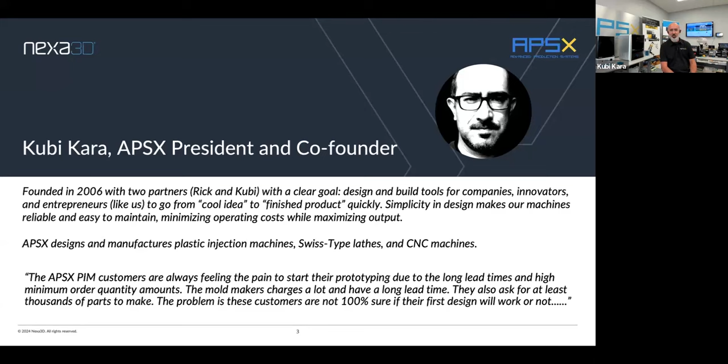Thank you, Carsten. Welcome, everybody, to our webinar today. I'm Kubi here at APSX. We have been selling these APSX PIM desktop injection molding machines since 2017, about 6 years now. Our specialty as a company is to downsize industrial machinery to portable, efficient, and affordable options for everybody. Our goal is to make them accessible to everybody, not just the ones who have budget for space.

And our company goals are multifaceted. First, one of our goals is our machines have to be affordable. And by affordable, that's not just the pricing but also the size, because for some countries, for some cities, space is also a premium asset. And also, our machines are sustainable. That means you can minimize your waste, and you can be environmentally responsible as a company or as a person. And another goal of ours is our machines have to be efficient.

That means you shouldn't spend a lot of time setting them up. They are easy to learn, easy to set up. And our final goal is our machines have to be agile, because if you go to market faster than your competition, that makes a huge difference. So our machines can provide a faster-to-market approach.

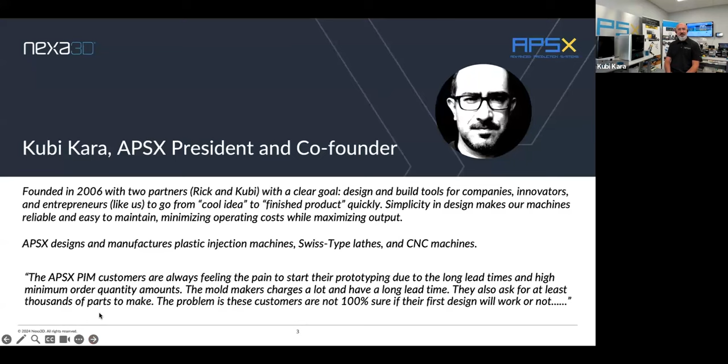Thanks, Kubi. So in general, we're going to refer to FIM, or whatever, during the presentation here and during the discussions. And that does mean freeform injection molding. So don't get confused. I just wanted to make that very, very clear that it's the abbreviation that no one else knows than a few here.

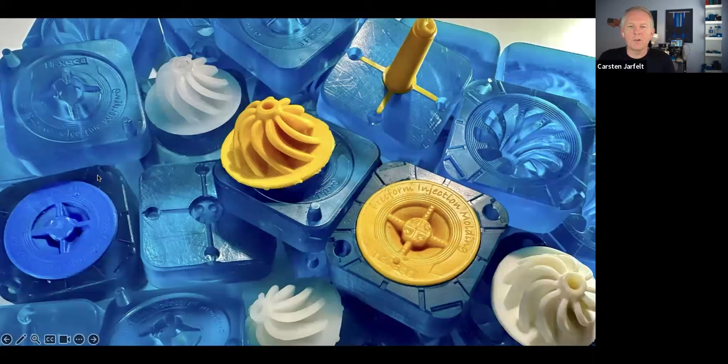But what people are starting to notice is that it is exactly as Kubi said, it's enabling teams to do certain things. And today we're going to look at parts that look like these that would be very hard to tool up for in any other way than this.

We're also going to look at what it actually means to have a technology backing your decision making, because a decision to do something or to not do something are both good decisions if they're based on data. That is sustainable and maybe impactful, if they're done on gut feelings, it's not.

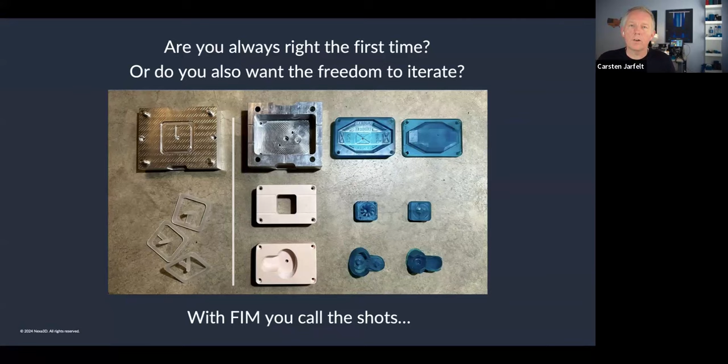So what freeform injection molding is doing on the back end of a lot of technology and software is actually enabling you to make decisions, validation studies, and give you options to perform or stop doing exactly what you shouldn't do at the current stage in the current design. So it's an enabling technology stack that gets you to places.

And I think the place we want to end up at after this webinar is actually on your end of this conversation. What does this mean to you? How would that impact your business? How could you gain competitiveness? What could you do that is different than what you can do today based on your current options available?

And then it's a lot about why using FIM. What is it? Who is using it? How does it look? That's the most important thing. That's the most interesting thing.

In our world, hands-on as we can be on these cameras here. And to you who sees the screen shared with slides, I do also have a couple of cameras. Let me introduce them. This is the most boring one - that's me.

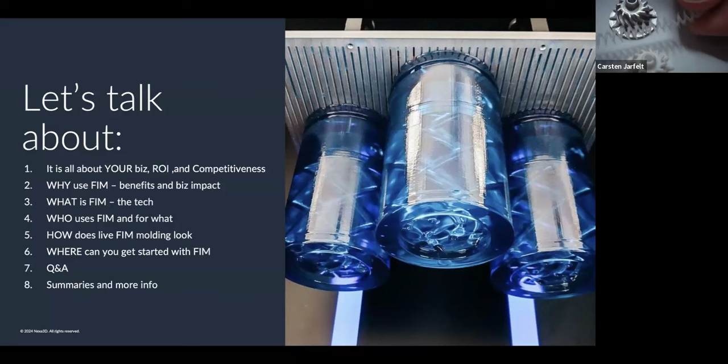This is the top-down one where I have all kinds of products that we can talk to if you have questions. Then we have a close-up over here because we also do metals, MIM, CIM, ceramics, and soft stuff, and you would have no clue what I'm talking about unless you could see it. So we have a macro camera.

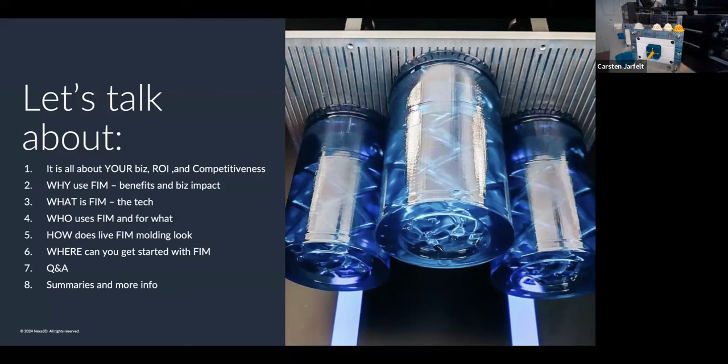And then behind me, just as Kubi was showing, I have Kubi's amazing machine and our modular mold bases. So during the Q&A, feel free to refer to any of these things that you just saw, besides just seeing slides.

All right, so back to your end of the stick here. What are you getting from potentially implementing what we're talking about? Well, if you can work with designing in new parts, new materials early on, that's maybe a business for you.

If you are able to customize, adapt, and do alterations on the go of very performance-ready and already validated parts, but now in need of a certain update or slight modification, this is a way that you can use FIM, freeform injection molding.

We have clients totally focusing on using spare parts management, using our tools for spare part management, because they have so low volume and so high performance criteria that they can now use this as a technology.

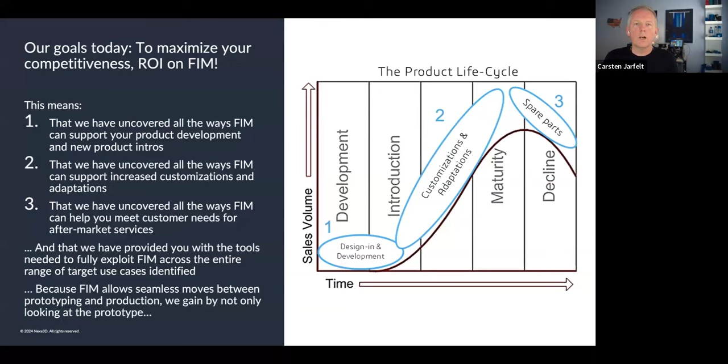But if you think about this product life cycle, how many places you are met with certain choices and non-choices or non-options. That's why freeform injection molding gives you that smooth transition between not just what we can deliver as a technology for you, but what are you actually going to make with that technology. And we are moving up and down that product life cycle curve all the way during the presentation and discussion here.

And I think back to the why. Why is, in my opinion, often about the business, about the value behind the technology and an offering, whatever it could be - in this case, FIM.

We touched upon it already, but you can do more and assume less, because you can actually make parts. You can test 7 gate position locations on your part on the same build plate, maybe the same day or next day. And then you will know which one of those 7 is interesting, and which 6 you shouldn't pursue further.

So that's doing more and assuming less. And then just the fact that you go from idea to parts in a very short time, without compromising, without being an amazing tool or mold maker designer - that is also value.

And then, I know it's a pun right there, but you call the shots, right? With the platforms that Kubi is standing in front of, you can see it's a 10-feet tool line with everything you need, from printer to cleaner, curer, demolder, and an awesome 5-ton mold unit, right?

So you call the shots, because you call also the supply chain limitations. You are the one, and then you can also sacrifice the time - well, you don't have to sacrifice time on heavy resource loaded tasks, because we have software helping you.

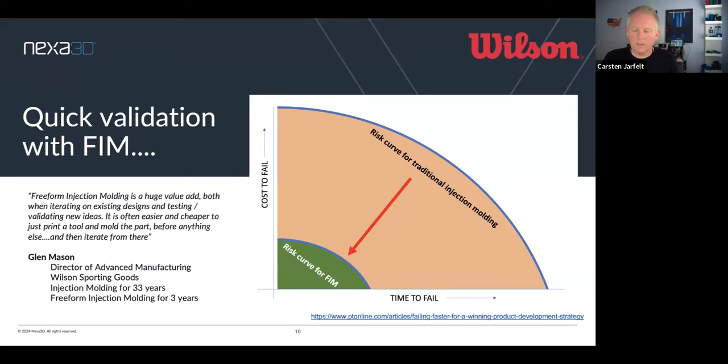These words come from a guy, the director of advanced manufacturing, Glen Mason, who has 33 years of molding experience and 3 years of freeform injection molding experience. When he puts it to the internal discussions when they onboarded our platforms years back, they talked about leaving resource-heavy tasks behind: not having to design a part for manufacture, not having to be a mold designer or do a mold design, and not having to build a tool but print a tool.

The part DFM and mold design simply was taken out of the lead time, and print versus build was shrinking the time to actually make a tool dramatically. So I think 3 years back they said they went from 12 weeks to 7 weeks of lead time. I think they're even lower now, but they cut roughly 50% of lead time on everything.

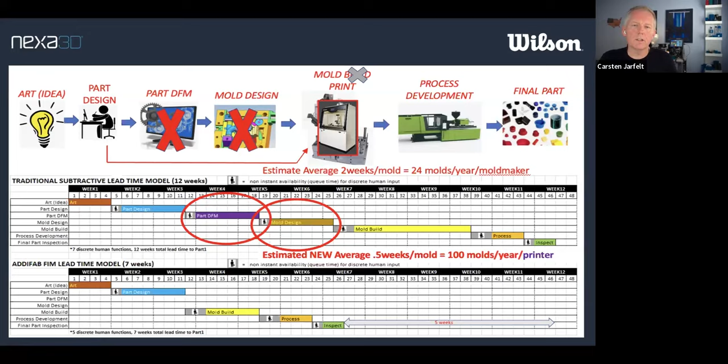And that's why you get to do stuff like this. Just 4 examples taken straight out of the goodie bag. Upper left corner, living hinges, caps, PP, 100% recycled PP. Upper right corner, PepsiCo's blue bottle or blue cap in HDPE for their bottles, a project they nailed pretty quickly, as you can see, using our technology.

Medical device adapters - anything in medical device requires certain materials, and we can work with those. Our technology is also biocompatible, so we don't change the properties of the material you want to use. And then lower right corner, badass 40% glass-filled nylon for automotive as an example.

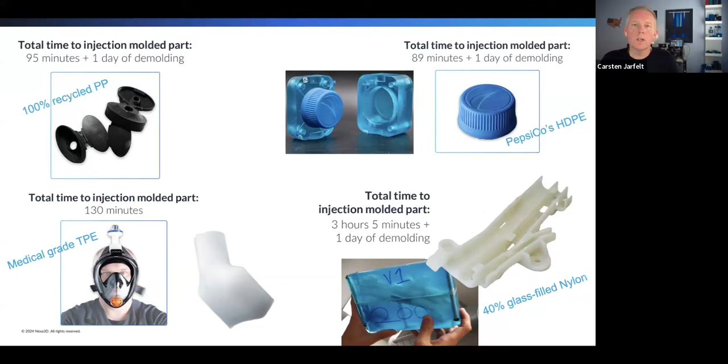But all coming to life in a pretty fancy, rapid way, but also without compromising what you're setting out to do. Original launch materials, step files that you want to produce, and with our software you can get some help in doing the mold files that you can print.

Printing is where it all starts, and where most, I would say, prototyping projects start out, because you want to explore stuff like design freedom and fast delivery of your first thing in hand. And then at some point you want to move on to molding.

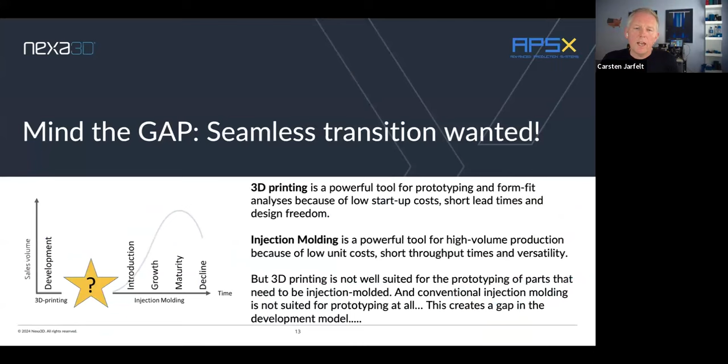What we kind of said is those 2 entities bring the best - they bring the best from the freedom, and they bring the best from the materials and processes. And you always had in the past to change between 2 technology tracks, but now you don't, because you can actually get the best of both worlds, so to say.

You can start up with the additive space, which brings you all that short lead time and design freedom. And then you can actually go over and take the versatility, scalability, and all that quality materials that are known to reside in the molding, injection molding part of the domain out there.

Combining those, you will actually get where you can go from an idea to a tool to a part to a validation thing seamlessly. You started out in molding, you just happened to use a printer to print your tools. But that same printer, the installed base, can also print you the parts.

So it's the beautiful handshake between - are we looking for form and fit today, let's print a part, or we're looking for form fit function, let's mold the same part. But let's start using the same installed base equipment to print in different resins. One can go to tooling, one can go to part level only, you could say.

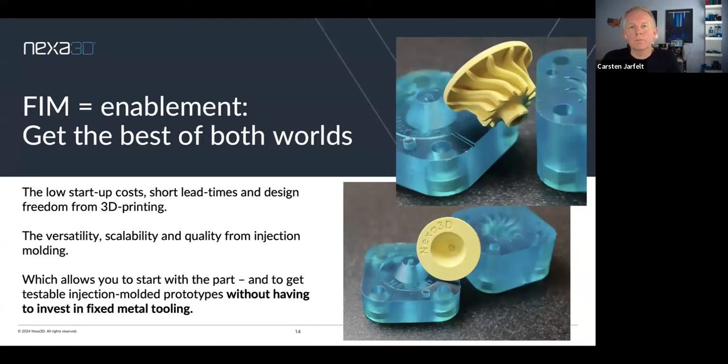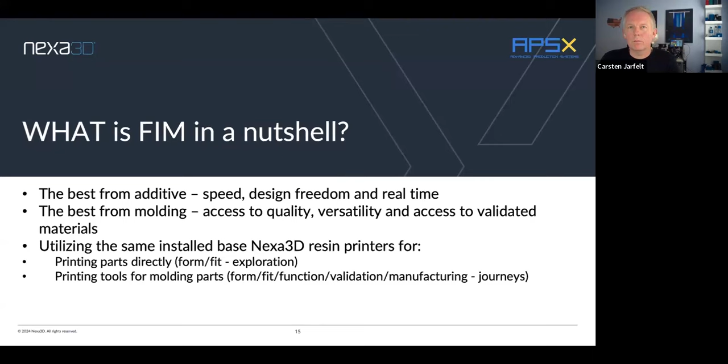So we want to bring you that, and we want to make sure that you don't get held back by technology limitations. We give you a hammer and a pretty good tool shed, but we know our hammer and tool shed sits very well with other tools, and you should use a combination of tools. FIM is just a pretty widely applicable starting point for designs, materials, and speed to something.

That mold design you print on one of our resin printers in a tooling resin called XMold. You'll hear more about that shortly after this slide. Then you go to the molding domain.

You might have Kubi's amazing machine, the 5-ton that I have behind me in my home office. I think our printed tools handshake with many mold units out there. It's not about what brand it is, it's what gets you going and gets you to places where you can decide stuff. You have a part, you have a tool design now, you have a printed tool that you take to a mold unit and you squirt material into it, whatever you want to do.

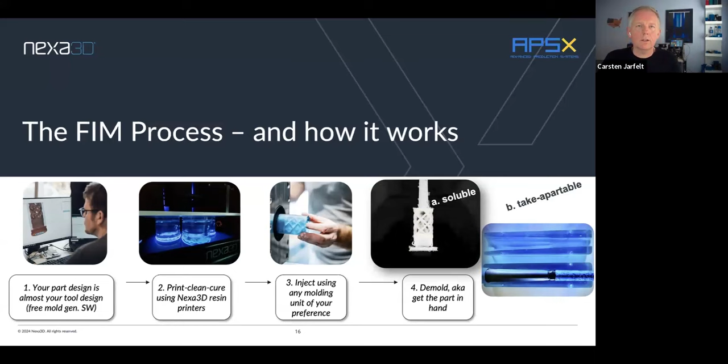And then you have a part sitting in the tool that you want to get out. If it's a complicated part with lots of stuff going on, you can dissolve your part out. If it's a pretty basic A and B kind of part which allows for that, you can open it up, depending on material, design, a few other things. But that's literally the process.

And if we were to make a video shortly showing that, it would be something like this. Let me just click it.

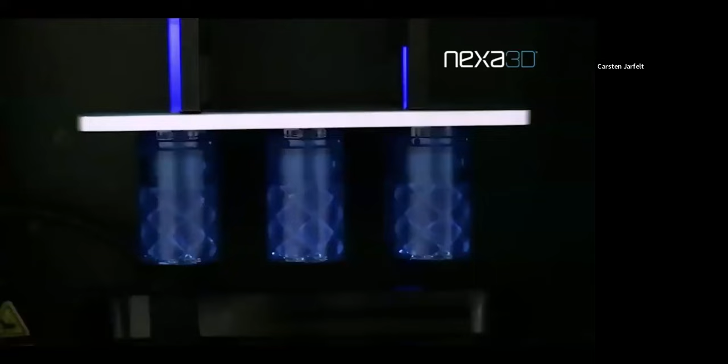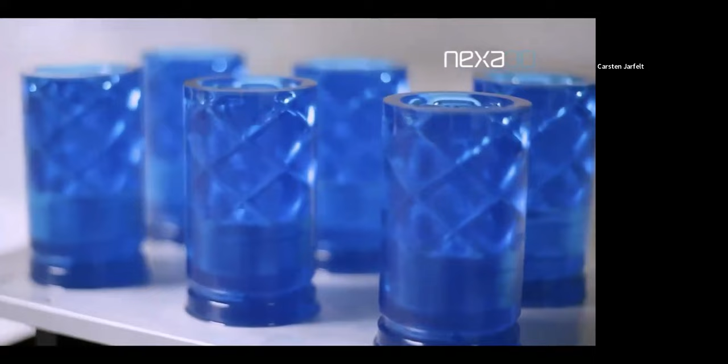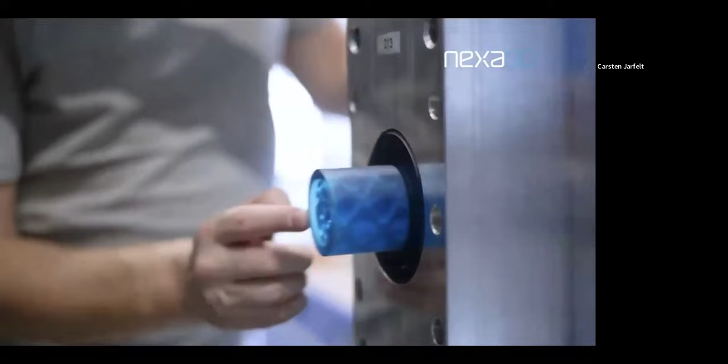As you can see, the XMold is a blue resin. You print it on any of our resin printers. You take it to the clean and cure station, and after that you go to the mold unit and put it in. This part in the video is actually a 50-ton mold unit where we use a spacer that we also print in XMold. You'll see more about spacers shortly. We use that to preserve most XMold, print the least, demold the least.

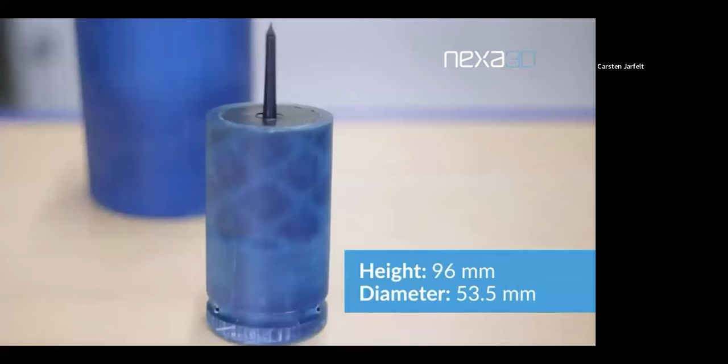But as you can see, the part coming out still in the tool here is a pretty complicated design gimmick, I would almost say. And the reason why we made it that complicated is so we can make the statement that it could be almost anything you can think of.

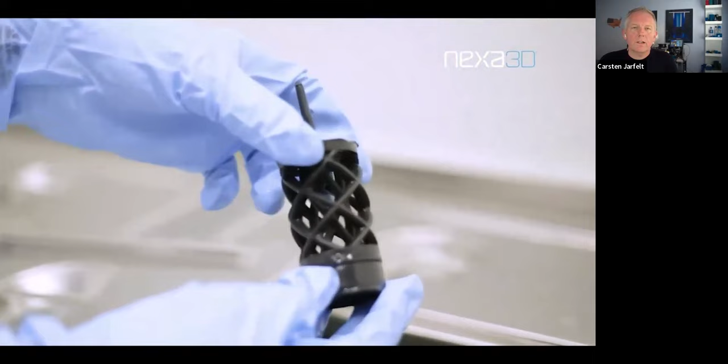And then we're getting to that solubility stage. Yes, this is a time lapse, so it does not take 8 seconds to dissolve our tools. It takes maybe overnight for the smaller parts, the impellers that Kubi will show later, or a day or 2 for larger volumes. But there are many ways you can accelerate that process. As you can see, the tool itself is soluble when needed, if needed.

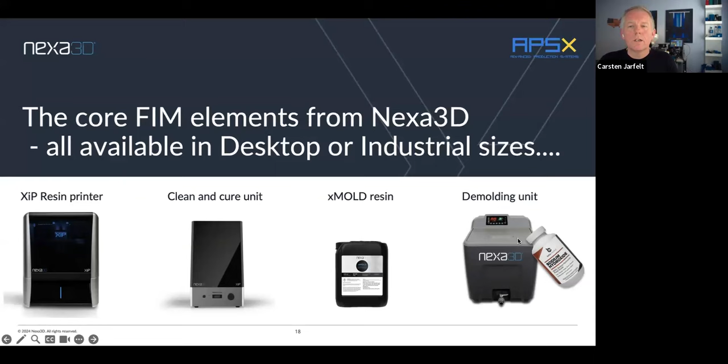So just a quick recap, because we're covering a lot of ground. A resin printer of Nexa, a clean and cure unit, XMold resin, and a demolder to get it out chemically using sodium hydroxide, an alkaline. Those printers, that line is what we call the FIM line, the Freeform Injection Molding line. That comes in desktop size, everything, and industrial size, everything. So bigger printers, bigger cleaners, bigger demolders, or as we show here on this slide, the desktop everything.

Let's spend just a few words on the resin before I give the ball to Kubi. XMold is that blue stuff you've been seeing in different variants, like tools or sitting with parts in them in the video. It's an amazing resin that brings you access to a lot of stuff like high temp materials. Our tooling resin allows you to inject parts at 400 Celsius scale temperatures into them. So PEEK, Ultem, PEC, PAEK, other high temp materials you can use with our tooling resin as well.

It's also that it gives you access to all the mold units out there with the standard molding pressures you're using, and the fact that it's soluble is giving a lot of extra value, as you'll see. A second nifty feature is that it's also non-stick. You'll see parts later that just release from the tool or parts of the tool in XMold because of that feature. And for medical device and food industries, it's interesting that it's a biocompatible process in general that allows you to work with materials that are otherwise hands off because of those strong regulatory domains.

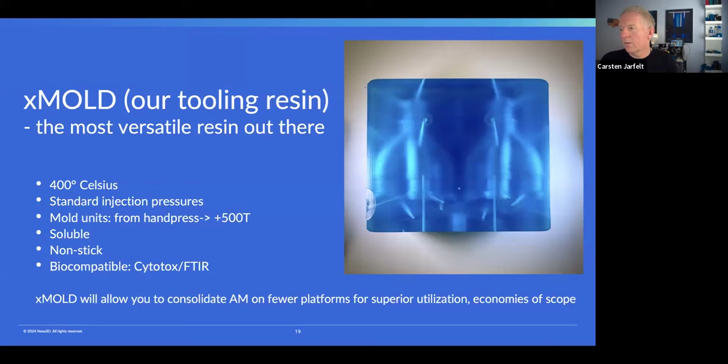All right, a lot of ground covered in a short time span. I'll give the microphone and the floor to Kubi because I want Kubi to share some of that insight. What happens when you then plug in a desktop injection molder, like you just briefly introduced, to this whole desktop line of FIM? Magic seems to happen. So Kubi, I will give the floor to you, and I will actually stop sharing slides to allow for full screen view of your window.

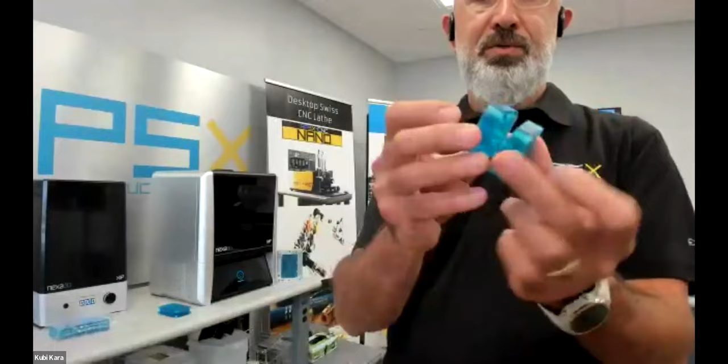We can start with these two units we have here. This is the 3D printer, and this is the wash and cure unit. You can use those to print your blue stuff, XMold, so they're injection molds or tools, we call it. In this case, we have a tool for a propeller design, pretty complicated part. Next to it, you can have the molding unit on the floor, and the final step is to use our injection molding machine, APSX PIM.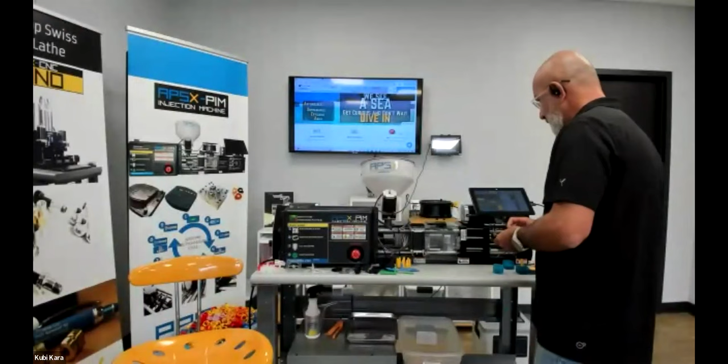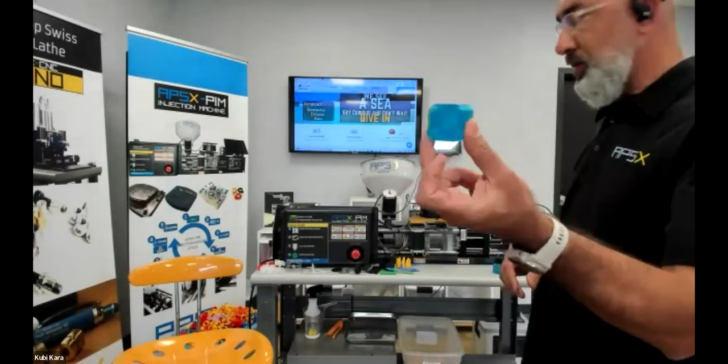So the machine is already warmed up to 192 Celsius to use a polypropylene yellow color, PP, so it's good to go. We have the pellets here on the hopper. Whenever we are ready, we can just insert this tool into the cavity, the mold base, and then it's going to be about 90 seconds cycle time.

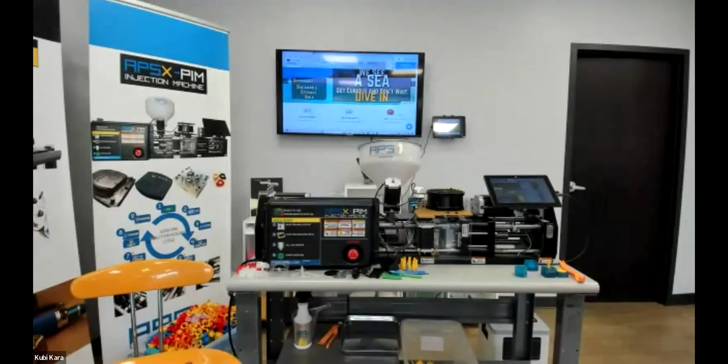I'm not sure if you can see me here, so let's get a little closer. Okay, so I'm going to insert this first, and hit run. So it starts like that with the clamping, and the injection pressure is built on the left side.

So it's completely clamping process, and then it's going to be injection, inject it properly, closed. Now it's cooling, and after that it's going to go back to home position, so basically the mold is going to be open. The difference between the 3D printed molds and the aluminum or metal molds is the cooling time - in this case a little bit longer than metal molds, because it takes time to cool them down properly. So in our settings, it's 45 seconds cooling time. That's why it's holding it at cooling stage.

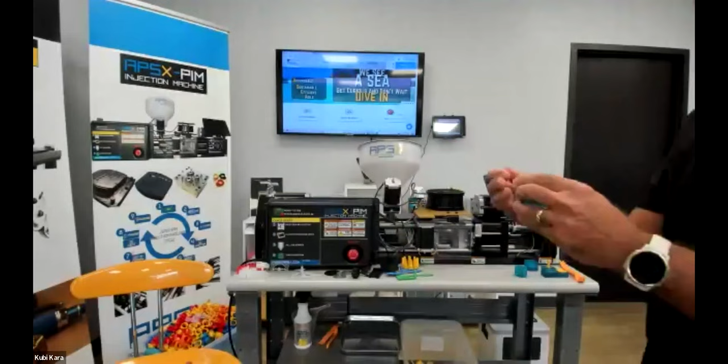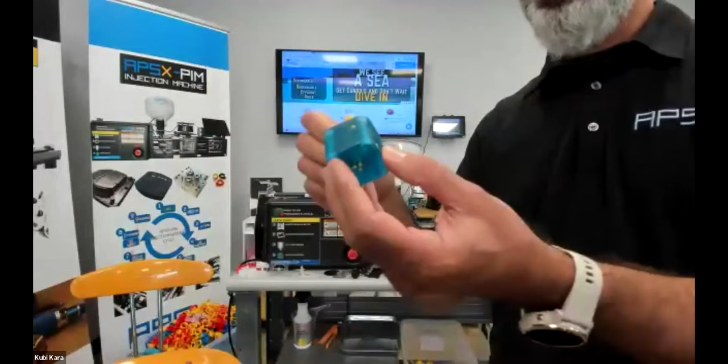And other examples would be these that you can make by using our machines. And now it's going to be open. I'm going to pull it from the base - I'm not sure if you can see clearly or not. That's the finished injected part.

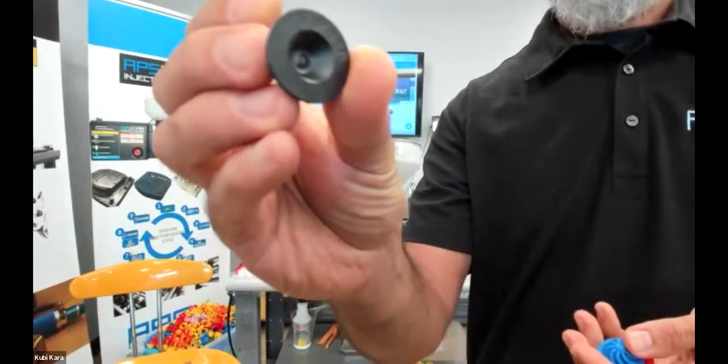If I try to open it, let's see... so you can see it's done, but we need to dissolve the tool afterwards. So it may take an overnight process to get the finished propeller. I have these, I can show you. So at the end it's going to look like this, and other versions of the similar propeller would be like that.

So that's it - the whole process in this case took 87 seconds, and it was a successful shot. If not, you need to play with the settings until you optimize everything, and you can save it as a profile and go from there. So back to you, Carsten.

Thanks, Kubi. My mind is blown every time I see this, because first now you see what space this line of tech is taking up. But when you saw the ease of getting complicated parts in hand like Kubi just did, I think it's worth noticing that, as you might see behind me, I have a similar mold unit in my home office here in Portland, Oregon. And when I queue that up for a client conversation, people are curiously peeking in through the screen or the cameras, wanting to learn more about that.

The fact that you can print the tool, put them together, put them in a mold unit, click run, wait the amount of time specific for the part and material, and then the next step is to either open up - I don't know if you noticed, but Kubi was able to just wriggle it open, and those four sprues, or those small four strings of yellow polypropylene we're using here, are just vents to indicate that the material has filled the cavity, the void in the tool. But the fact that one side just gives because of the non-stick, and the other side with the complicated propeller design gimmicks will have to be dissolved because of otherwise very complicated metal tooling - I think that's the beauty of that. You can use this side again and again, so just one side has to be dissolved.

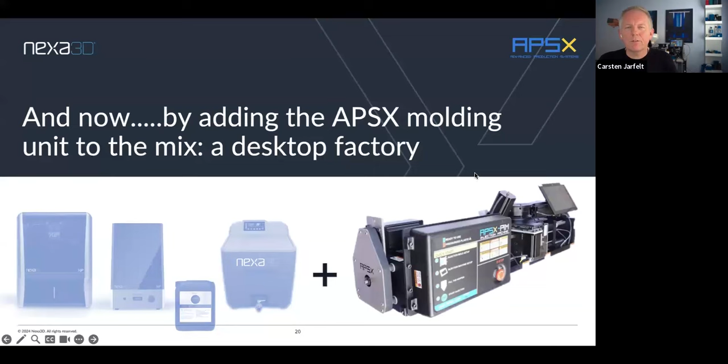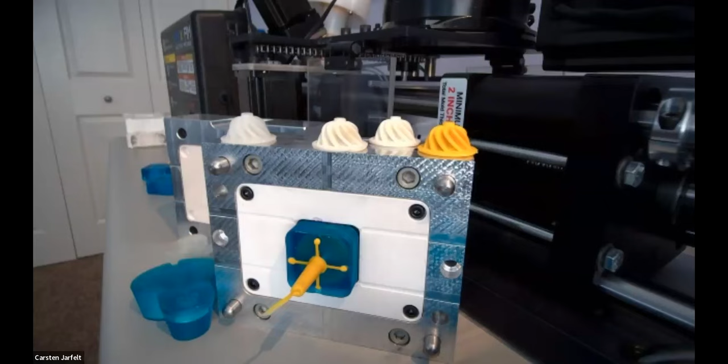I'm going to bring up a slide here again, because nothing beats seeing the stuff up close. But I think what you saw happening inside the mold base on the unit—imagine you have a mold unit like the one behind me. Let me actually walk over to my mold unit. I hope you can see—I'm gonna unshare this and show my full screen behind me here.

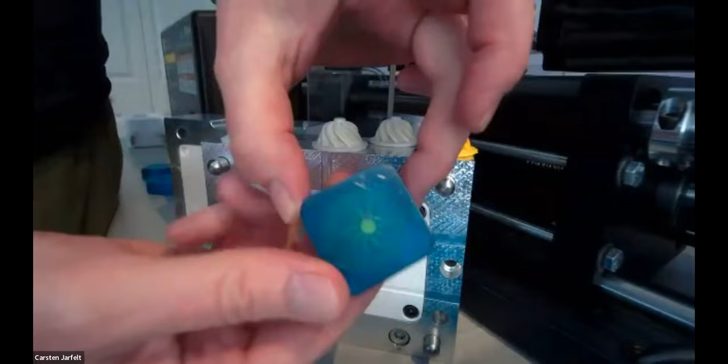So I'm gonna walk over to my mold unit, and what Kubi showed was that all the complications of the part design are captured in what we've printed. All the part features, all the undercuts, all the things you want—it's all about the part. So you can get to a part easily, in a validated, repeatable way. That's the game here. It's not so much about what happens on the mold unit, besides that it needs to be consistent, predictable, and uniformly happening every time.

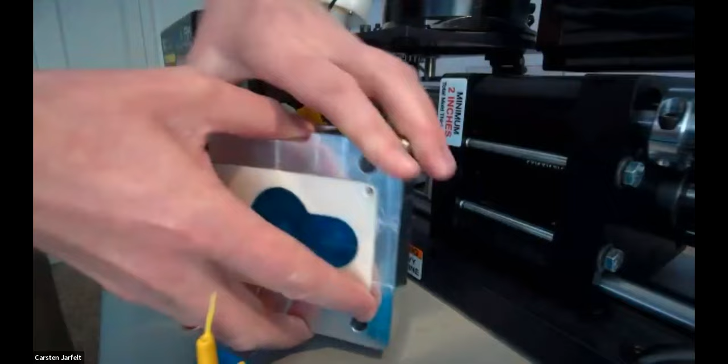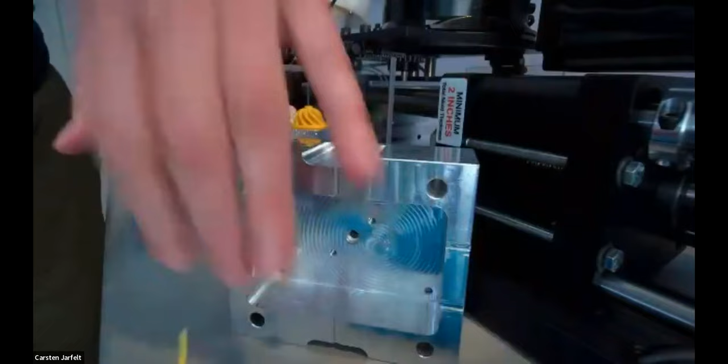And that's why we use this mindset that we call the mold base. Everyone familiar with molding will know what a mold base means, but this is maybe one level up from what you normally see. What we have is a block of aluminum that is cut to fit the mold unit here, the APSX PIM Desktop molder. In order for us not to waste too much XMold, we kind of size things down.

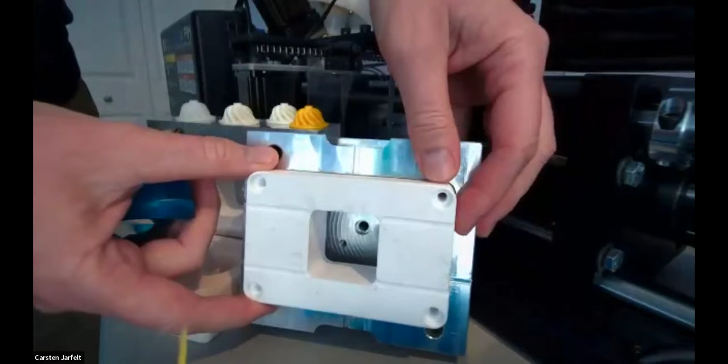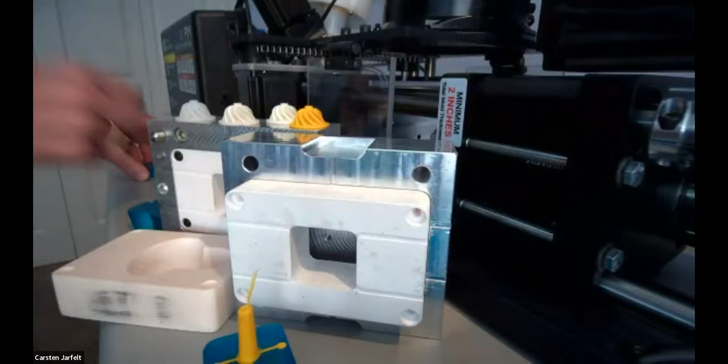In the impeller design case, it could be a mold base like this. This is just a printed spacer in X-ceramic, a material that we also allow you to print on the same printers as XMold, the Nexa resin printers. In that one, we could put a tool—of course not filled, but an empty one—that has this complicated part that Kubi showed, and out comes the job of the day, which is the impeller. But imagine you had something slightly more—I wouldn't say complicated, because the impeller is complicated enough.

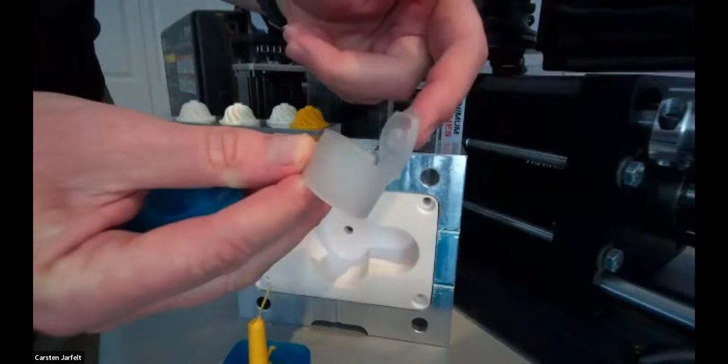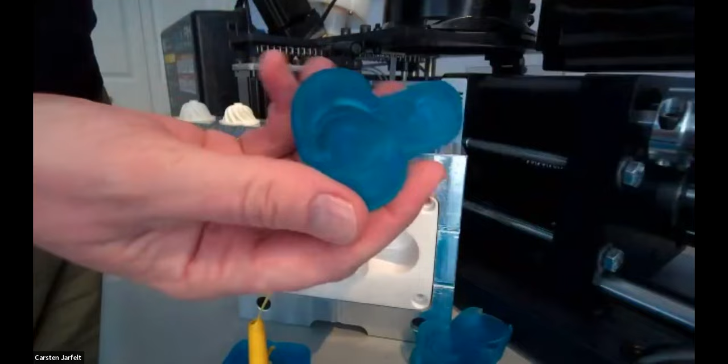This is also an X-ceramic spacer. But if you were to do today's design where the part might have a lot of physically important features—like a living hinge that has both a closure function and the actual living hinge going forward—if you can print a tool that lets you go almost near net shape, what you're getting is a little bit of blue XMold tool around it.

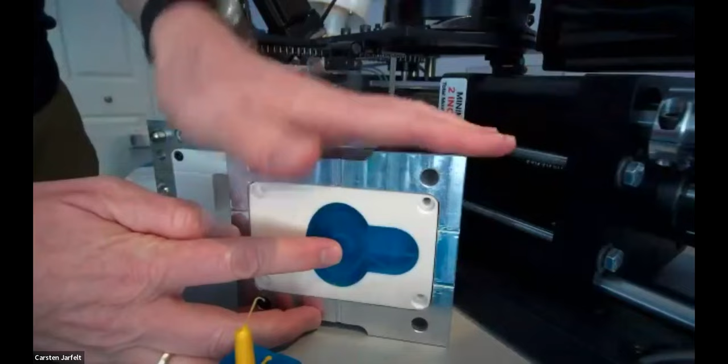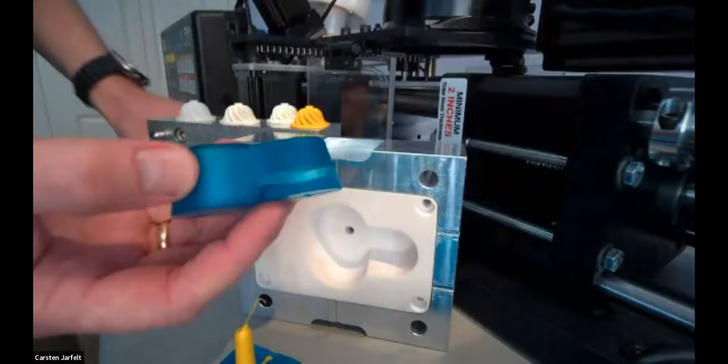When you take that approach of mud base adapters to the next level, you put the two-part tools, which we've printed on our desktop resin printers, into the mud base here—imagine this is sitting in the mold unit, so it's difficult to see. Then you inject that one, pop it out, as Kubi said, and put it in sodium hydroxide because of those pretty complicated design features. That's a process that's possible because you can work like that.

And I think when you can work with the mindset of what you're setting out to do, and get your technology to follow you to places where you want to go or potentially want to go, that's where we see people—I wouldn't say have fun or smile—but definitely get to places they couldn't before.

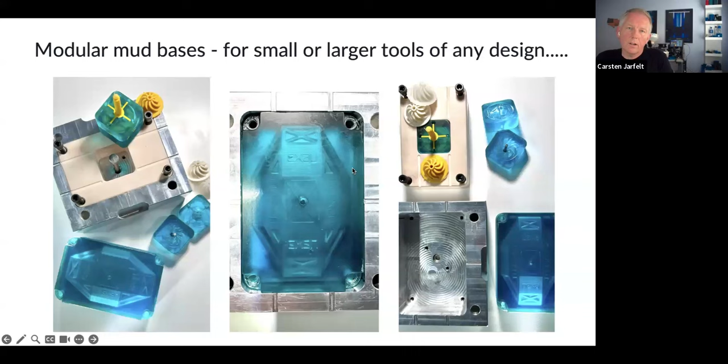Let me go to full screen again. So this is what I was trying to show—adaptable mud bases, small things, big things, and the APSX unit can shoot up to 1.8 ounces of material, which is a lot for such a desktop-sized unit. When you use those mud bases and that approach, you can shoot small or big parts, but you can get there pretty quickly and on your own terms, in your own time.

I think this is just a way of saying what I showed there—you can literally put anything in these spaces. You can also optimize for throughput by putting the least XMold and the least dissolvable tools into action. And with the APSX unit, that goes up to—what is it, Kubi? Is it 300 and how much? It's 315 Celsius.

So 315 Celsius will get you to a lot of materials already there. And if not, I've heard something about higher temp units becoming available, but I'll let Kubi cover that in the future. The playground is extensive with that mold unit, with that setup, and with that temperature range.

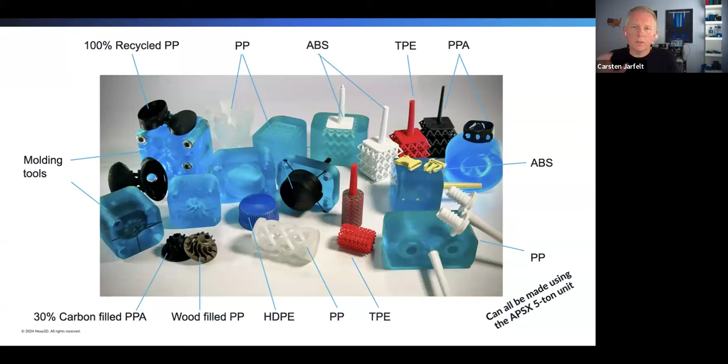If you notice that Kubi put the hold time and the cooling time much longer than you would normally do in a metal tool, that's because the XMold blue printing resin is a damn good insulator. That means the part is sitting in a tool where it sits in a pocket of blue resin, and you can transport it to the next step in the process. But the holding time or cooling time is a little longer simply because of that.

But when we talk about enabling you to go places with this technology, it's also about being able to do things pretty rapidly. So the tools we're demoing here today can fit on the desktop build plate, which is the XiP Desktop unit of ours. It can fit 4 complete sets, so 8 halves of those tools we're using for demoing, and they will print in 28 minutes.

So around 7 minutes per tool. And keep in mind, they don't need to be 4 of the same design tools. They could also be 4 different sizes of tools or parts. It can be meant for different materials that you're going to inject into them with different shrink rates, so you have adjusted the tool sizing for the shrink rate you get from the data sheet of the molding feedstock.

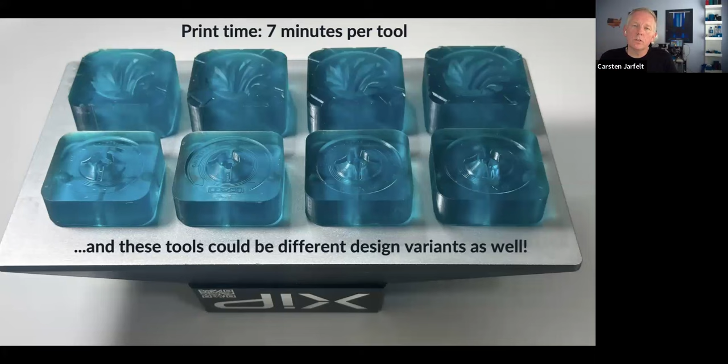That part is regular molding, but getting to tools you can not only produce but also have maybe designed yourself using our mold generator software that comes with our platforms - that's another enablement. So if you were looking at what Kubi just showed you live, it would look like this in a project overview.

So 8 halves, 4 tool sets in 28 minutes. And as you also saw, half of that tool could be reused because of the non-stick property - there's almost no impact to that tool. Of course, if you go several hundred parts in that tool, some degradation might be noticed. But until that matters for your results, keep using what you can reuse. So 8 halves, 4 tools in 28 minutes.

You clean and cure them in that UV cleaning curing station, and clean them in IPA. We have processes all described for that. Then you injection mold them in the APSX unit as shown here, in a couple of minutes, all the tools. I saw Kubi did yesterday on Memorial Day, 60 parts in 2 hours, for some demo we're doing for a trade show later next month.

You can split the tool right there to check if they're full. You can demold the rest overnight. So literally you're talking about a 24-hour cycle, or maybe a 1.5 day cycle including a night, to get parts in hand - and that could be your design, almost any design.

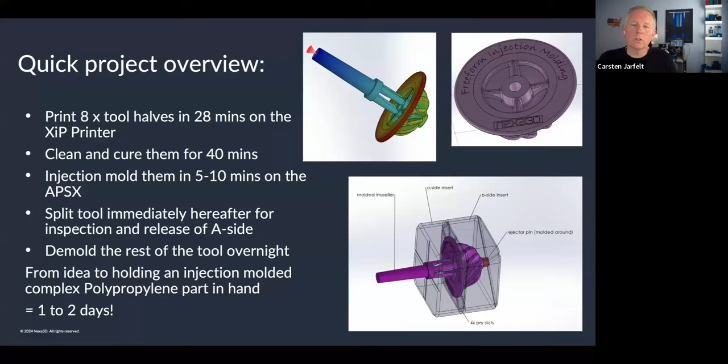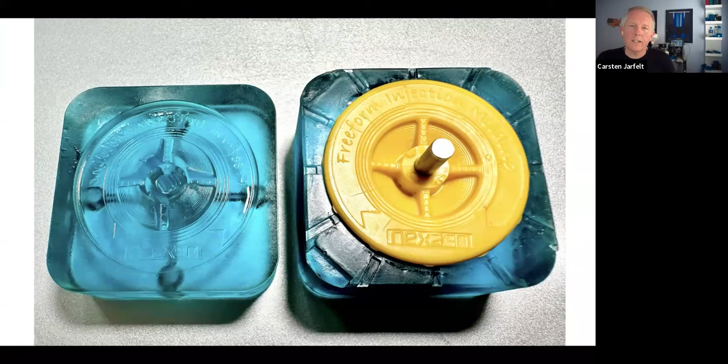When you look closely, which is hard on these web cameras, this is the part we designed as a variant of that gimmick, printed in 100 micron layer thickness on our desktop printer. Those tools - but that goes for our desktop printers and our industrial size resin printers as well - you can set those settings to fit today's need.

Then we have had a lot of joy working with a lot of different clients and industries out there. And I think it's always a good question to reflect on, where does this work for me, and what would be a good way of having some references from others who are using this. I think what we see is an industry where materials matter - it comes from either performance, regulatory, or limited choice where straight out of the gate you can only use certain things.

We've done projects for clients who could only use Optima LT3 implantable PEEK. Then it's a joy to say, let's try that - and PEEK is one of our high runner materials, so we know it works. But it's always nice to enable a client out there to actually continue using exactly what they are launching the parts in. And I think that's where we come in and say, we are not masters of everything, but we are extremely curious.

So we have infrastructure in place that can address your needs. If you need a service bureau that offers this, we have that for you. Do you need the platforms yourselves? We can allow you to get some platforms for sure from us, from Kubi, from all our resellers.

One thing we have a hard time accepting is if we can't have that curious conversation around what would this mean to you. In the industries where we are present right now, it means the whole thing to these teams out there, that they can decide to progress those projects or stop them, take them back a step, refine what they saw, fix the errors they made today and move them forward tomorrow.

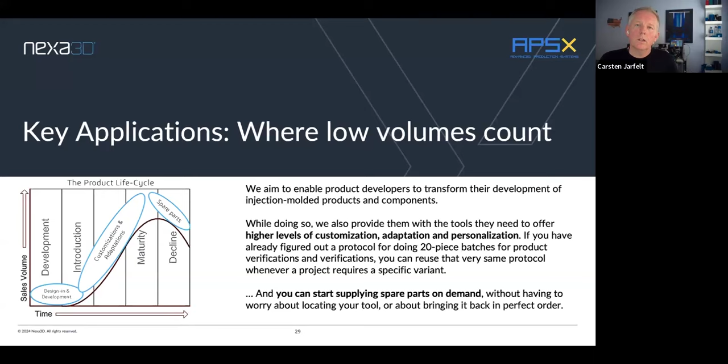The same goes for some of our clients, maybe you've seen this with PepsiCo. We're extremely proud of how they adopted this technology, especially in what you could refer to as a critical path project. What is a critical path? In our world, it's all the elements you need to combine together to get a product that you can decide certain things based on. So if all the parts in a given product aren't there, someone is the bottleneck, someone is waiting for something in order to decide those important final steps.

In this case, Team PepsiCo was already blow molding bottles with our technologies using XiP printed shells as liners for a complicated blow molding tool. But before you have a final product, a bottle with a cap, you had something on the critical path. That's where we stepped in from a curious point of view and said, what are we looking at? We turned around together with the team quickly, in a matter of days, a handful of different designs so they could move forward without having to change anything like materials. They just sent us their materials to use and their design files, different designs they had in mind.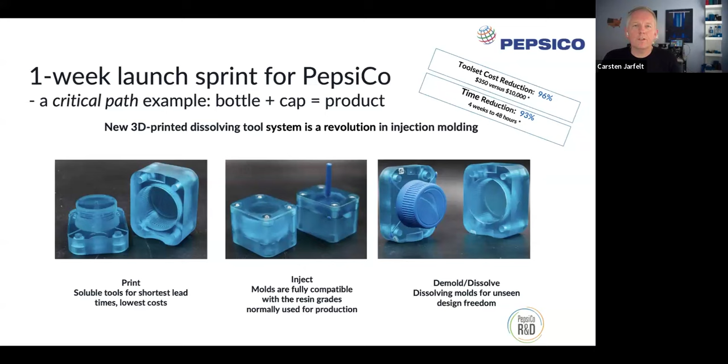That's a lot of reduction, as you can read on the slide: time reduction 93%, toolset cost reduction 96%. But it's also a lot of enablement on many other things that you can start to explore.

Same goes with our team over at Wilson Sporting Goods - total other end of the scale, a much bigger part, by the way. Tough material - we don't even know what the proprietary carbon fiber material is, but we know it matters a lot when you can print tools overnight. That enables you to have 25, 30 bats in hand next day, where you used actually a 418-ton press to put A and B tools together, like an insert to a bigger metal tool.

Here they took the part design they wanted and molded it the same day, actually, or next day, from having an idea about it. And that's, again, a lot of value add on the client side.

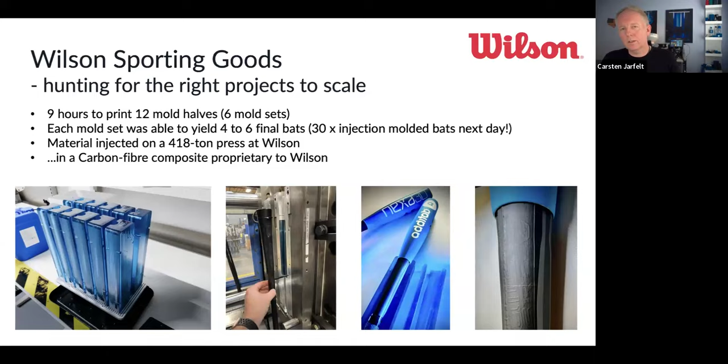Another client, Team Blue and Team Red here, but we are not allowed to show any parts from the Coca-Cola team. The verbal quote here from Kyle Layfield is dear to our hearts, because he and the team are touching upon some true values of ours, and that is having that complete design freedom, as they talk about functional realism, as you saw with the living hinge cap before.

Functional parts testing is just one step up. Extensive material options, meaning we don't have a short list as such. And then those final physical characteristics that enable advanced R&D to work without the traditional constraints.

That warms our heart. All right, enough tear shedding on all those great cases and a lot of words flying on the screen here and in demos, so you can get started as well. And of course, we're in the business of enabling you, and we have small, big solutions, both.

Nexa 3D and APSX are producing all our parts and shipping them out of the US, so you will get US made, US shipped parts and systems should you want to go there. We can help you get projects started, and we can get you to explore what it would mean to your business, having the opportunity to work with freeform injection molding as an enabler.

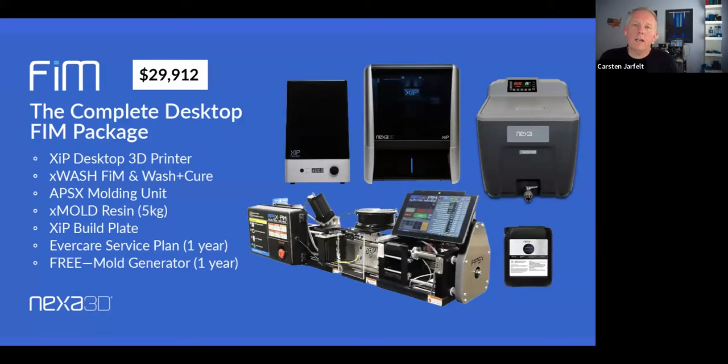I think the fact that it just sits on the trade show floors, in demo rooms, in labs, in units, in OEMs' garages and startups' garages makes it a very agile technology platform to use, and affordable for the fact that it's a damn good printer, a damn good tool maker, a damn good tool designer.

You can mold your parts, you can demold your parts, and you can make decisions based on, as we were starting out to say, doing and not assuming. And that makes us proud that we could potentially enable you to do as well.

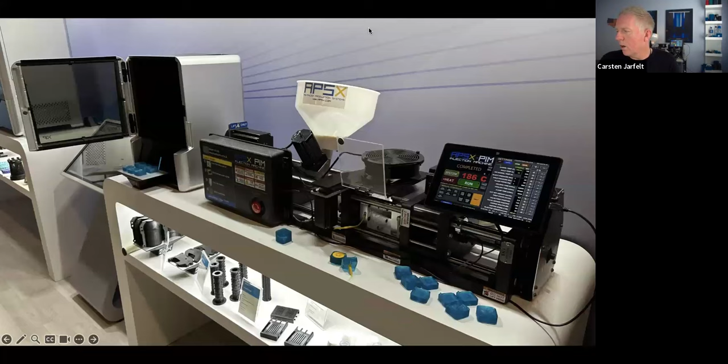I'll hold for now because I think there could be some questions. I didn't check the Q&A, but let's open up and see what's there. Yeah, lots of really great questions, and that's super exciting stuff. Great presentation, guys.

I'm going to start with a very specific question, and I'll field these to you, Carsten, and you can decide to send them over to Kubi. We often create components with small features that are 0.25 to 0.5 millimeters. Often molding companies have said that they cannot mold these due to pressure required. With a 5-ton capacity, would the injection molding machine be capable of creating this size of features? Also, what is the minimum and maximum shot size of the machine?

Okay, I will take the first, Kubi can take the other. But again, all projects using FIM are based on details, materials, design files. Flying in from 30,000 feet here, we can only get as precise as the tools we can print on our printers, and they are 50 micron in all axes natively, roughly.

That being said, you can use things we haven't even covered in this presentation: hybrid tooling. You can insert or embed metal pins, cores into these printed tools, or you can drop our printed enablers into other metal tools already there. So there's a hybrid approach we didn't cover that can get you places where only metal can go in that mix. But judging from the question there, let's go and explore that project. You know where to find us.

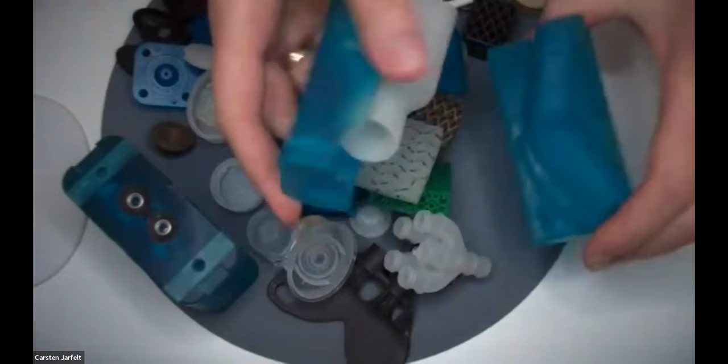So here's our top-down camera. This tool set made this medical grade adapter in medical grade TPE, flexible but hard, a 70 shore. This tool set made several hundred of this part. Because of the flexibility of the part, you can wring it off the center core, and because of the non-abrasive material data, you could have several hundred.

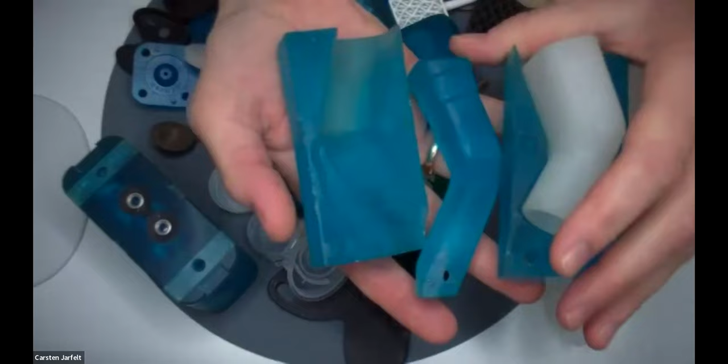What you'd need to do, because of the insulation, is print a couple of these sets and cycle them so they don't get too warm. Then you can cycle through a couple of these tool sets, which might set you back $40 in resin and print time.

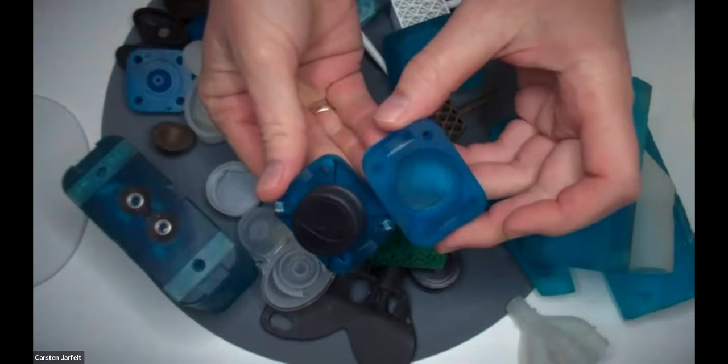But then you can get several hundred out of these tools. That's one way. The other one Kubi showed, let's show it with the PepsiCo cap here. If you see the cap sitting here, I know it's black, but it's still the same. We reuse this part quite many times, 50 to 100 times, because it has a straight pull.

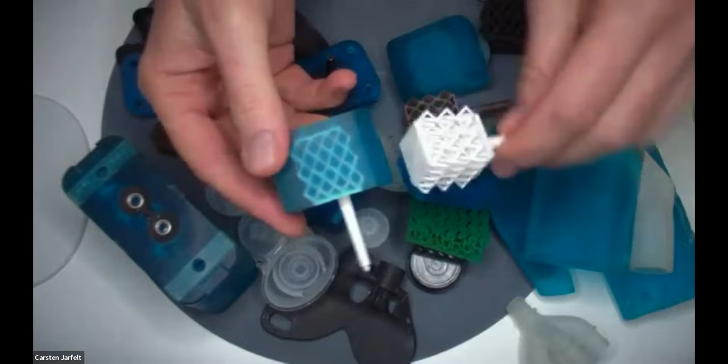The temperature of the material doesn't degrade the tooling, so several hundred times. But sometimes you just get one, like this one here. If you want this out, this complicated lattice, you'll have to dissolve your way out. But if you want an ABS injection molded lattice, maybe it's worth it. So there are quite a few flexible options, I'd say.

Great, are there any alternatives to sodium hydroxide for demolding?

You can't tell there's water in this bottle, but you can use water. It takes longer, definitely longer. But if you happen to have one of those non-compatible feedstocks out of the gate to inject into parts, polycarbonate and alkaline do not have a good match.

That doesn't mean you couldn't do an X-mold facing surface against the polycarbonate part that you could pull out. But the moment you have a polycarbonate part you want to put in the dissolving phase using sodium hydroxide, that's a place you could turn to water and it will come out.

And in the demolding phase, we both raise the temperature and have active stirring with impellers in the demolding unit, so you can have some help accelerating that.

Great, can you describe the storage and preparation of various plastics, such as humidity mitigation, drying, preheating, and any additional equipment needed to enable this?

Maybe that's for you, Kubi. Is it related to plastic pellets, like resin? Yeah, humidity mitigation, drying, preheating.

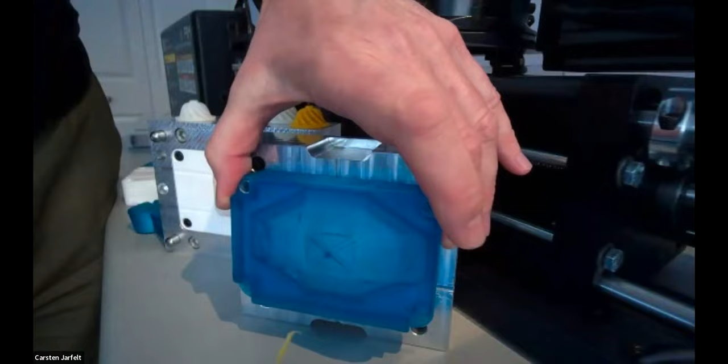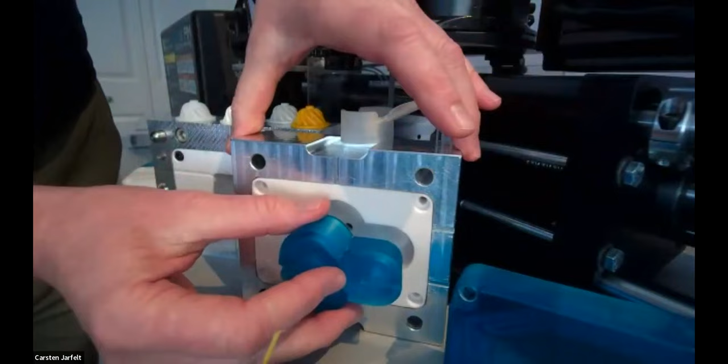The advantage is flexibility, and you being able to save XMold. I'm going to show this one again. If you can print this amount to get you this part, or print this amount of XMold, it's a no-brainer—you want to print the least. But what you notice here is also that by printing a spacer to gently sweep around the whole design, you get a very uniform support, because XMold is slightly soft, you could say, but it's hard enough not to give, while being soft enough not to break and stay rigid. Back to the question before, what makes sense to use.

But a very uniformly pocketed shell mold kind of tool is only possible if you have this. Most don't have a CNC unless they contact APSX and get a desktop CNC, which they also provide. Others, if they have the printer, can pour in the XMold and print spacers in XMold. That's why we use XMold—because it comes from the same print opportunity, the same tech stack your printer allows. But you could also cut it in aluminum if you had that option.

Awesome, I think we have time for a couple more questions. This is a good one: can you explain how to create the file for the mold itself? Is there any special software or tools needed to do that?

For many years, freeform injection molding was just a way of saying—and I'll show this with a part—you have a part design, box it in, remove the part design, put in a gate and a couple of vents, print it, and shoot it. That's the basic assumption of how you design tools.

After that, we noticed most people aren't that capable, and not everyone is that free-spirited. So we have what we call the mold generator software. It's not a magic tool where you drop something in and boom, suddenly you have everything right there. It's more an augmented process that tells you: is this a cosmetic side, should you put the gate there, what is the intent here, should we split the tool or leave it as a mono-block tool, and so on. That's the mold generator software, and it's something we deliver together with the systems. It's a good starting point.